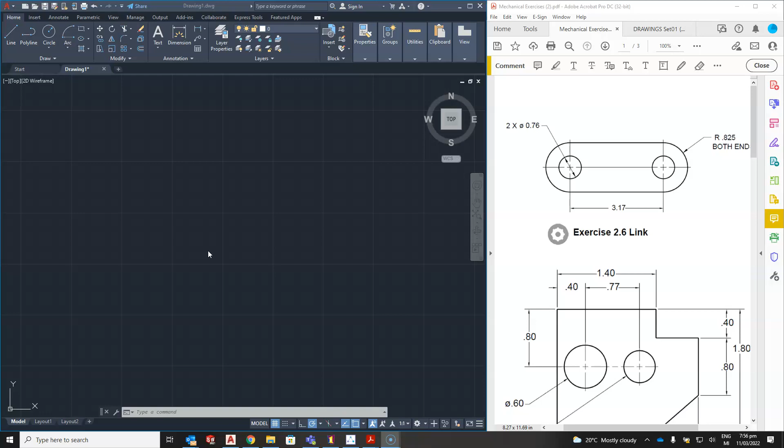Okay, in this little video we're going to do another one of our exercises. We're now going to look at this gasket and look at some of the ways that you might do it. You could have your own way. There's no right or wrong way necessarily, but you do want to try and come up with a way that makes the most sense to you and is the most efficient for you when you're doing it. So let's have a look.

We'll start out with a line. Oops, let's change that over there. Let's come back and click in here. We'll turn our mouse highlight back on. And so we want to draw a line in here. So L for line. The top of this is 140. And then we want to come down 40, making sure I'm keeping those green inferencing lines where they should be.

Now I've got a sense of scale. I can zoom in so I can see it easier. Come out this way, we've got to do a bit of maths here. The overall is 200. This is 140, so 60 in there. And then we can come down 80.

Now at this point, we either want to work out where this other point is. We don't know the angle, we don't know the length of this line. So we can work out again with a bit of maths where this corner is, or we could push escape, go back to the beginning and come around the other way. So let's do that. Escape, line, start here and now come down this way, 180, then come across 130, and then we can go up and join on

to the last bit. So now when we go to put in the circles, there's again multiple ways to do it. So we could draw the circle just on the corner. Again, checking, it's giving us a diameter of 60, so we want a radius of 30. Then take that circle and move. We want to take the center, we want to move it down and across.

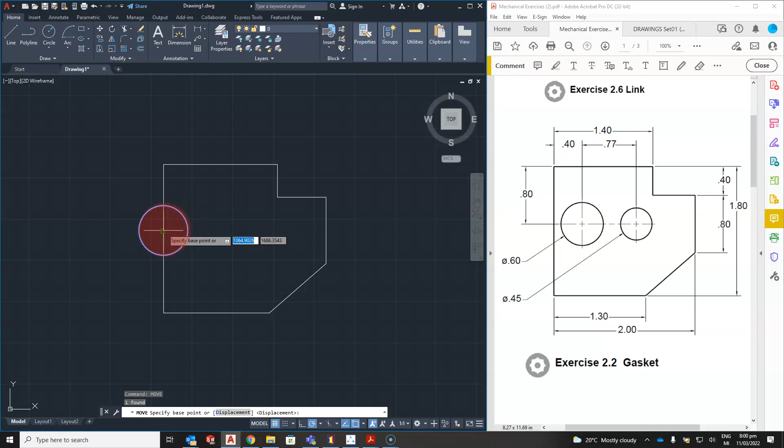So now the circle has started at 80 down, put in the 30, and then when we move, we've only got to move it across 40. So then when we do the next circle, we could do the same thing. If we hover over it and get the center, and then we start moving to the side, we're now getting the distance from that center at 77, enter, and then we can draw that circle.

And again, if you don't want to quickly do the maths, it says 45 diameter, so we could go down to diameter and type in 45. Okay, so a couple of different little ways that we could position those circles. The other thing you could do with this, if you were using absolute coordinates or even using relative coordinates, we could still employ the use of our x0, y0.

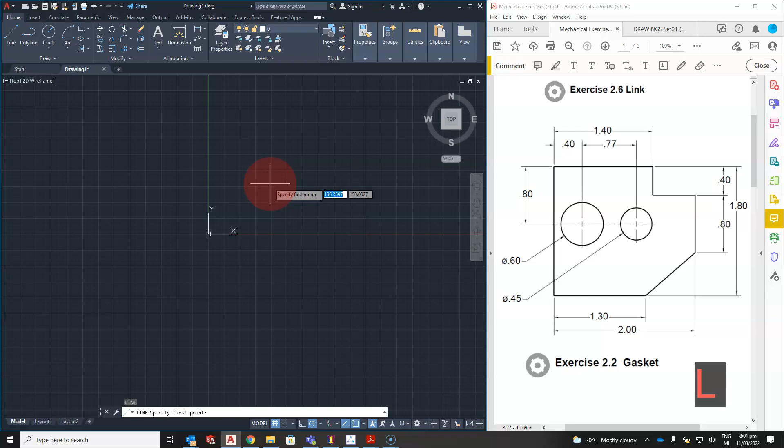So line, specify the point, 0, 0, enter. So that's our x0, y0. The next point would be 140 in the X, comma, 0 in the Y. So there's our line that's 140 long. Now what I might do for this, I'm actually going to go and turn off the inferencing lines, because what I'm actually wanting to do is not use those lines and use my coordinates instead.

So now it's relative at the moment. So I can just say I want to go 0 in the X, comma, I want to come down, so it's negative 40. And then I want to go straight across 60, comma, 0 in the Y. Come down, I'll zoom in a little bit. Come down again, 0 in the X this time, and negative 80.

Now you notice AutoCAD in the standard setting is set to relative coordinates. We've talked about that in class. But watch what happens when I go to actually type my coordinate in. So in this one, we'll do a bit of maths. So it's 200, to this point is 130. So therefore, this distance here must be 70. It's 180 minus 80 is 100, minus 40 is 60. So it's 60 in the Y and 70 in the X.

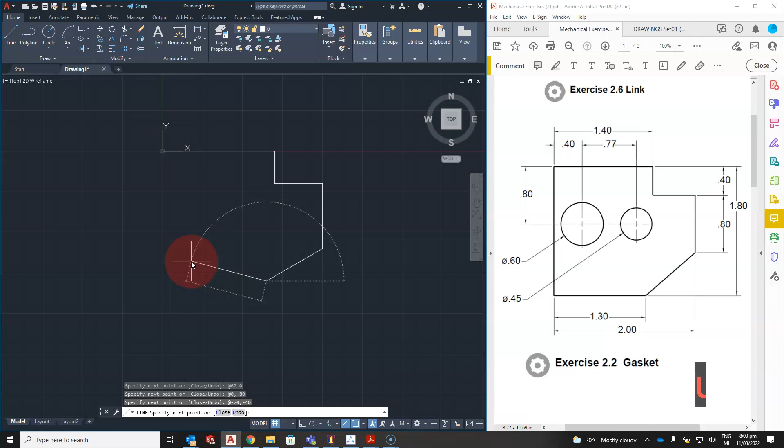So again, I want to go negative 130, comma, it jumps way over to negative 130 as an absolute from x0. But then when I put in 0 for my Y, enter, it jumps back to that relative coordinate, which is actually 130 from there. And then we can go up, join it on. So then if we want to do our circle, C, enter.

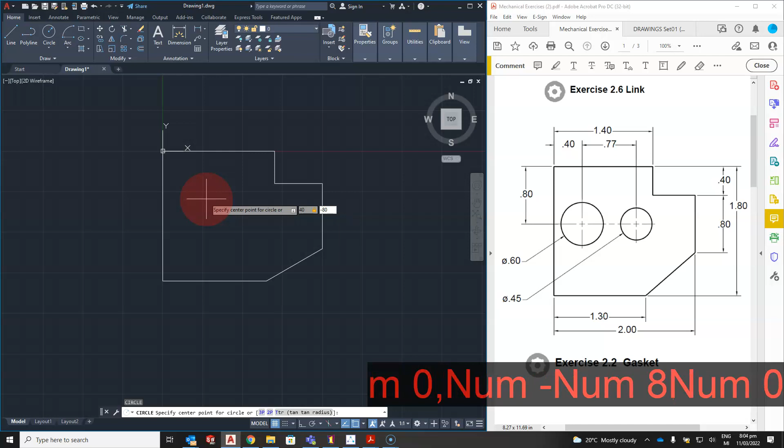So now I can type in the coordinates for the center point as being 40 in the X, comma, minus 80 in the Y, enter, and there's the circle down where it should be. We want a diameter for this. Now I've been going down and clicking on it. The other thing you could do is hit D, enter, and that's changed it to a diameter, 60. Okay, so now circle again.

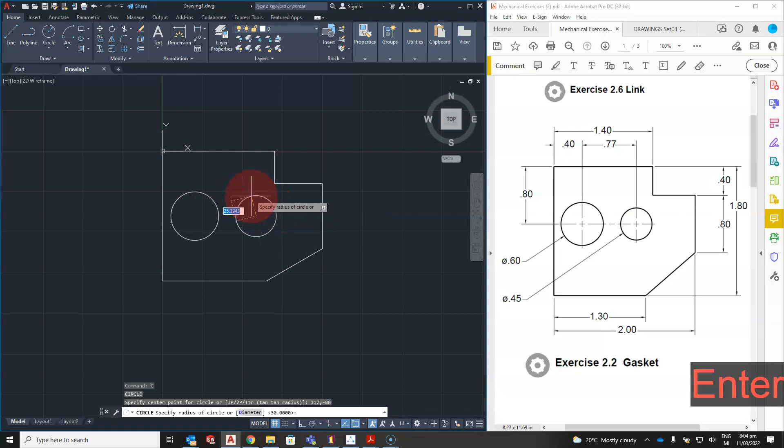In the X, it's going to be 40 plus 77. So what's that? 117, I think. So 117, comma, negative 80, enter, there it is. D for diameter again, and this one is 45. Okay, so that's a couple of ways to draw the gasket. I don't really need to do this, but I'm just moving them down so they're closer together.